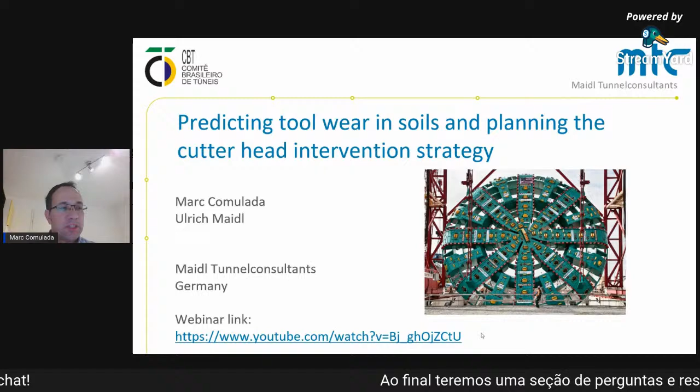Thank you very much, Daniela, for the introduction. I'm very pleased to participate in this webinar hosted by CBT, the third webinar we're holding now on different topics of TBM tunneling. Today we have a topic which is maybe one of my favorites right now, quite a difficult topic and also quite an important one. It's on predicting the tool wear in soils and planning the cutter head intervention strategy. This is a short overview of the contents we'll go through today.

I'll start with an introduction, then we'll discuss tool wear. Inside tool wear, we'll go through the governing factors, how abrasion is measured in soils, how we correlate abrasion and wear, and how we manage tool wear. Then we'll continue with interventions: when to intervene, types of interventions, procedures for interventions, and finally a strategy approach to handle this topic, plus some concluding remarks.

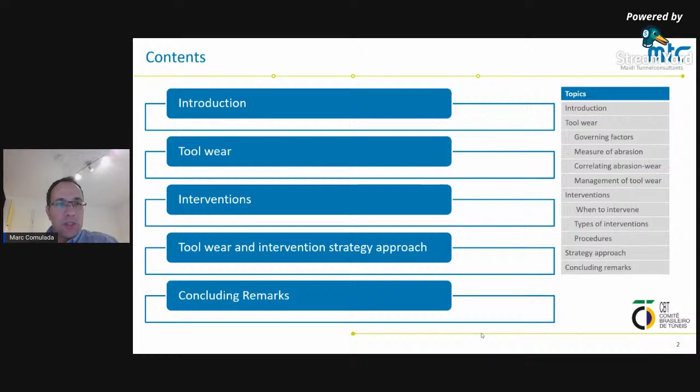So just a very brief introduction. This is going to be a presentation with quite a practical point of view, among other reasons, because for tool wear prediction and intervention planning in soils, it's a very important topic for designers and contractors, but there's hardly any solid theoretical model or background. As we'll see today, and I think that's the main aim of my presentation, to show that it's very complex, all the variables it involves, and different than in rock.

In rock, we would be able to present different existing models which are more or less validated and more or less complex, but actually there's no real soil or tool wear prediction model in soils. So it's based very much, as I point out, on the experience of designers and contractors. Although it is a very important aspect, because it is a main cost and time driver in shield tunneling projects in soils, and it is very often a source of losses and disputes.

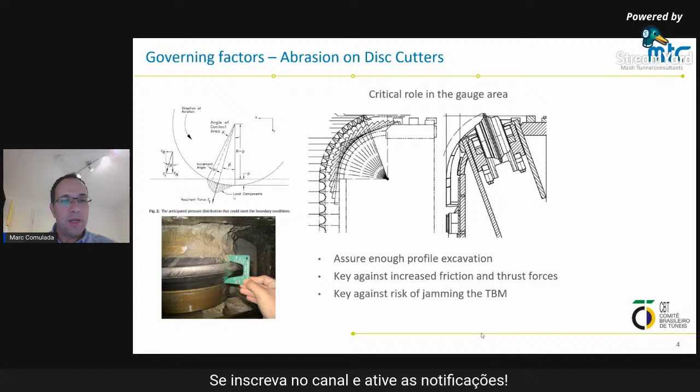Starting with the governing factors, we will start with abrasion, which is what I think most people come up with when they think of wear, but it's not only about abrasion, as we'll keep on seeing right now. The important aspect of abrasion is we have to consider the different types of tools on the cutter head. So we have the disc cutters to start with. I think more or less everybody's familiar with this type of tool. Disc cutters are not so much a tool to excavate soils.

However, disc cutters are installed in many projects excavated in soils. So that's why we're also presenting the disc cutters here, although they're actually hard rock tools. They play an important role in soils, especially to assure a proper periphery of the excavation, to assure that we have enough profile of excavation, and that the TBM is always going to have a gap to push through into the ground and not to get jammed. So in this sense, it's one of the main aspects for the disc cutters in the periphery area to assure the excavation profile.

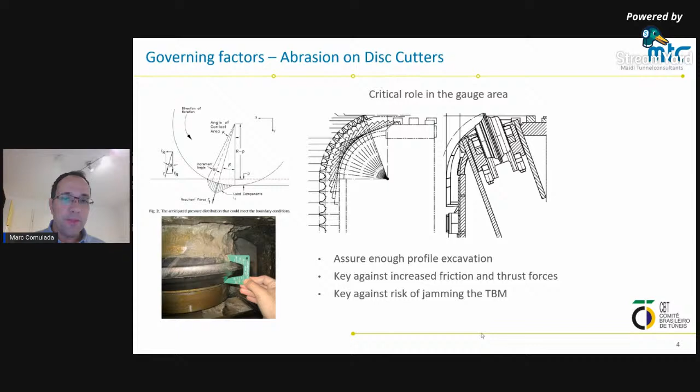And of course, these discs obviously suffer from wear. We can see a picture on the bottom left. One of the reasons they suffer wear so much, and become a crucial tool to decide when we have to enter the excavation chamber to do an intervention, is because they are located in the outermost part of the cutter head, often where we have the highest speed, so higher wear rates, as we will see later on. We also have to enter more often to change them than other tools, because we don't want to risk the TBM getting jammed.

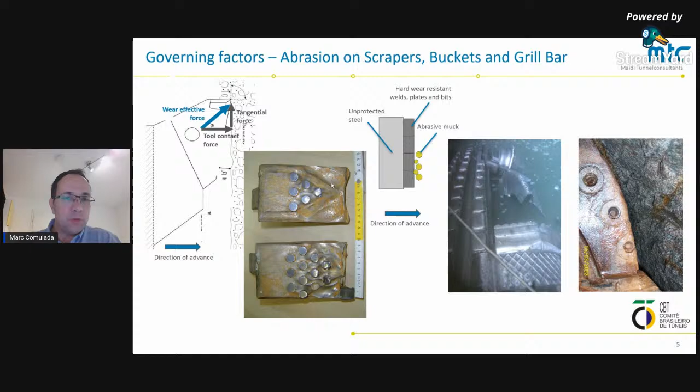And then we have another type of tools, which is also used in soft soils instead of the disc cutters, although from our experience, the disc cutters are still used in soils more than these tools that are the rippers. I think rippers are a very useful tool to excavate in soil, and they obviously also suffer from wear, and this is something we also have to analyze.

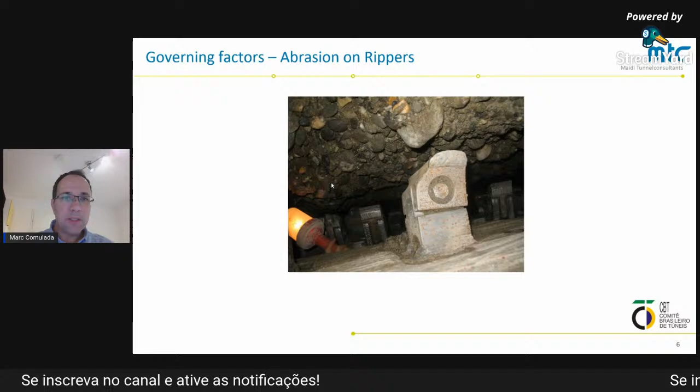I didn't mention it before, but the wear produced directly by the scraping or cutting process by friction is what we generally call the primary wear, and this would be increasing the secondary wear. Besides this, clogging also produces a blockage of discs, which produces higher wear of the disc because the disc starts to flatten. You can see that in certain pictures later. It flattens, it gets blocked, and then it starts to wear very easily because it's not turning, it's not working properly. And then we also have the blockage of the cutter head openings, which sometimes just block the cutter head. You can see some pictures here of blocked openings on the cutter head.

And then here is also another criteria for entering into the excavation chamber. We don't only have to enter sometimes to change tools for wear, but to clean the excavation chamber and the openings when we have a lot of clogging. So this is also an aspect to take into account when we're planning interventions.

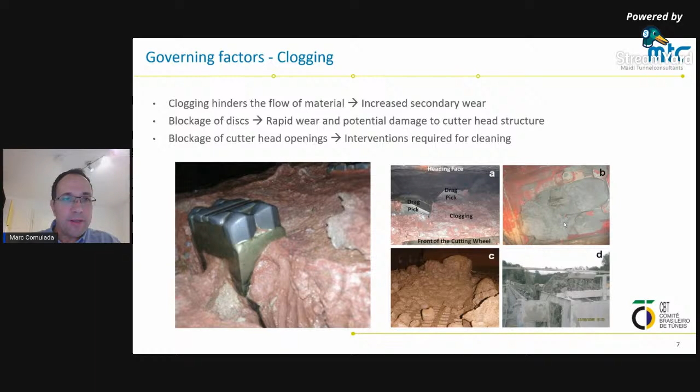There are other factors that produce wear and tear or damage on the tools, requiring intervention, such as impact loads that produce breakages or chipping of tools. In these situations, it's necessary to enter the chamber, especially when we have severe damage and the tools aren't working properly anymore. It's imperative to do an urgent intervention before further damaging the cutter head.

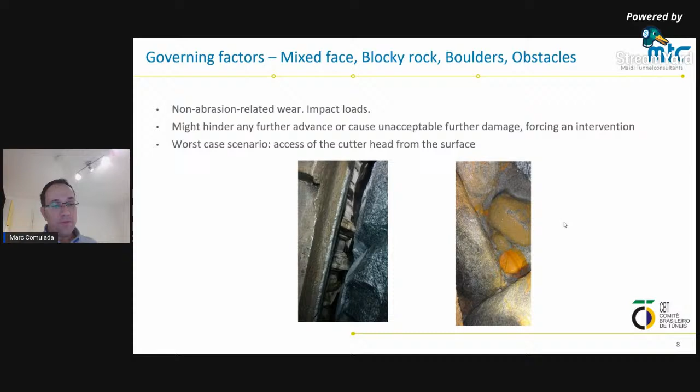This can happen in very few rings in shield tunneling, especially in EPB tunneling. We can have a large amount of damage if we don't intervene in time. In the worst case scenario, we have unstable conditions where it's not possible to enter the chamber anymore, and we have to access the cutter head from a shaft from the surface to repair it.

So there are several other aspects related to the cutter head design. Excavating exactly the same tunnel in the same geology, we will have a different situation regarding tool wear, tool consumption, and interventions depending on the cutter head design. This we've seen in many projects.

One of the first aspects in cutter head design is the selection of the tools. We have soft soil tools, as I mentioned before - the scrapers, and there's not only one type. There are different widths and shapes of scrapers, and selecting the right type for clay geology versus sandy or gravelly geology is crucial. Then, obviously, the disc cutters.

The disc cutters are actually rock tools, but we use them in soils too. We sometimes need them because we have soils with rock, mixed-face conditions, or boulders inside the soil. The only way of handling these rocky parts of the tunnel face is with disc cutters, and we can handle this with different sizes of disc cutters.

17-inch, 19-inch would be usual diameters in metro tunnels or bigger road tunnels. Deciding what type of cutter depends not only on the strength of the rock or blocks I'm going to encounter, but also on capacity. The bigger the disc cutters, the fewer disc cutters I can install - it depends on the size of the cutter head.

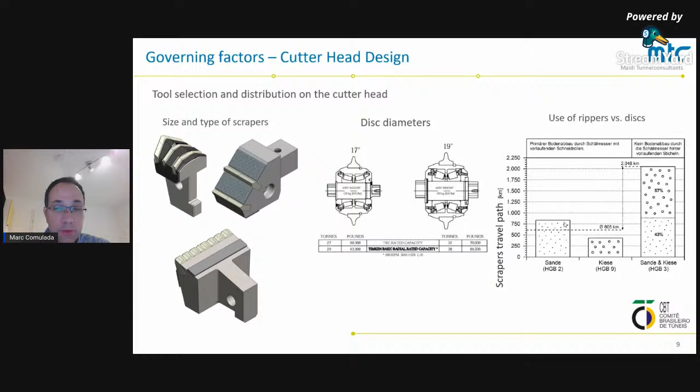Obviously more openings means the material will flow easier towards the back of the cutter head through the openings into the excavation chamber, and that's what we always want. We don't want the material to be moving in front of the cutter head very long, producing secondary wear.

And it also depends on the technology. EPB technologies generally require a more robust cutter head than slurry shields. Not necessarily always, as I will explain now.

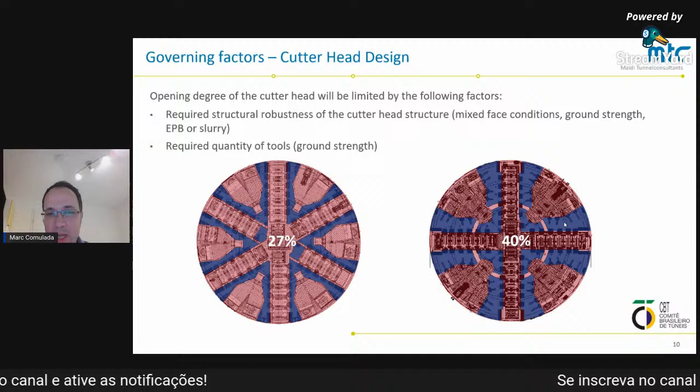So it had to be designed as a very massive structure, with a lot of disc cutters to handle very resistant rock. On the other hand, we have the EPB shield on the right-hand side, which is excavated purely in the same geology, a clayey geology, very, very homogeneous. So here we don't have any especially high loads, and we don't have especially strong ground, so it's possible to make the cutter head structure lighter.

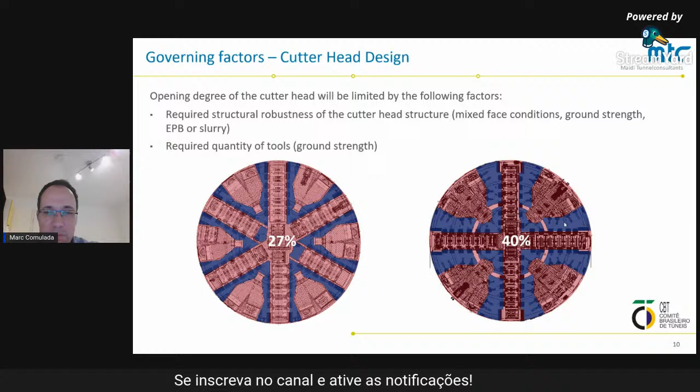And obviously, the situation on the right-hand side will be more favorable for minimizing wear, etc. But it's not always possible to do it that way.

And also the cutter head center - I will present several slides in this presentation regarding the cutter head center. It's one also, together with the gauge area, the periphery of the cutter head, where we have a lot of wear. The center is also part of the cutter head where we suffer a lot of wear, because precisely the cutter head rotation speed, the linear velocity in the center is very low compared to outside. So the material in the center practically can't move anywhere. Besides, sometimes we have to install tools to excavate the material right in the center, which makes us have the cutter head very closed with very low opening ratios.

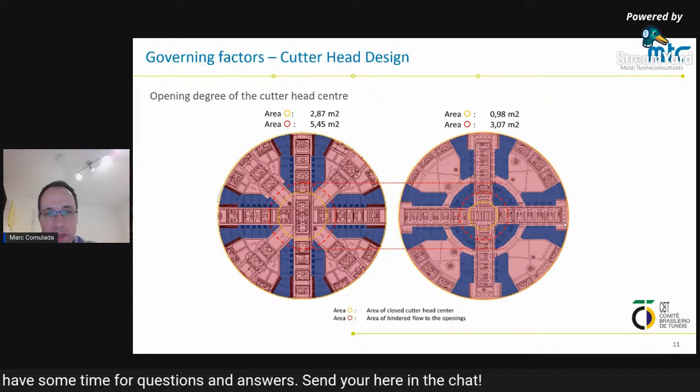However, there are more optimum designs than others. You can see this comparison here. These are two reference projects with very similar diameters. We can see on the left-hand side a cutter head design which is much more closed. We're comparing the area in the center, which is completely closed - it's much higher on the left-hand side, almost 3 square meters compared to 1 square meter on the right-hand side. And it's not only right in the center, also around the center, that's the red circle there - we have all these angles between the spokes of the cutter head, which are normally going to get blocked too. These areas in the cutter head on the left-hand side are also much larger than on the right-hand side.

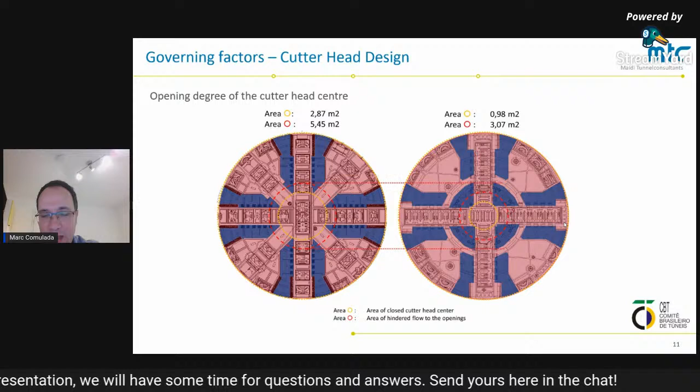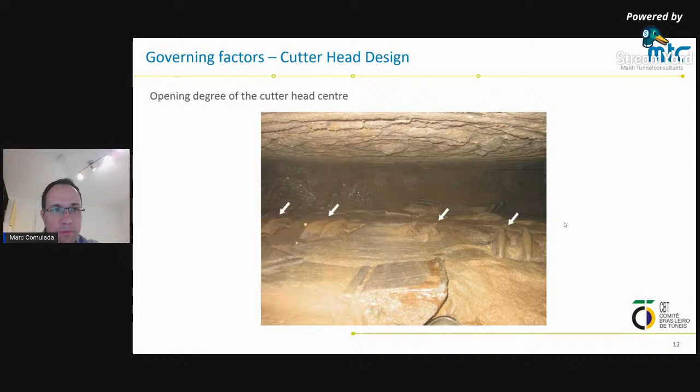Then there's other design aspects. I'm pointing these out because these are parameters that we can more or less actively design, and they have a very relevant influence on the cutter head.

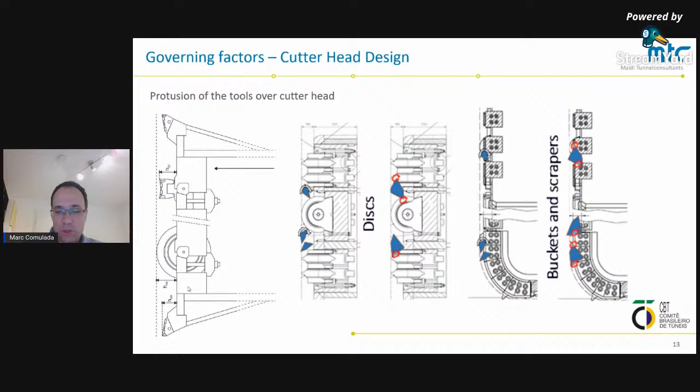This is the level of protrusion of the disc cutters over the cutter head, and of the scrapers or rippers. Depending on the geology, if we know we're going to hit cobbles and boulders in the soil, we need to plan a height of protrusion high enough to allow easy flow and movement of material in front of the cutter head. If we had a very small protrusion, the cutter head structure, tools, and scrapers would be more prone to impact loads and wear.

There are other aspects too. When the cutter head is large enough, we can install hub protection wedges that protect the housing of the disc cutter. With these welded wedges, the disc cutter hubs, which are the body of the disc cutter, are more protected against impact loads or secondary wear. Obviously, this is only possible when we have enough space on the cutter head to install all these wedges.

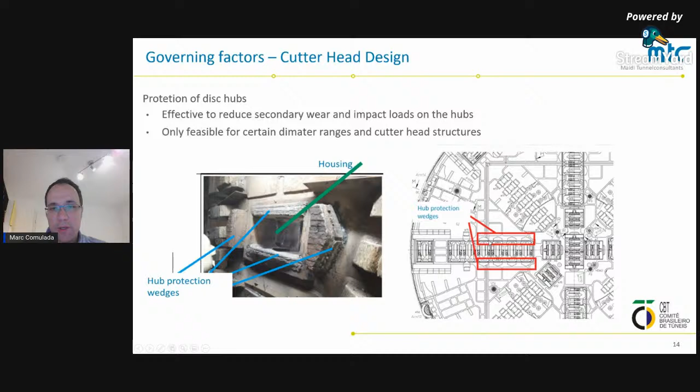Then there are scrapers. These are tools that, especially with more gravels, cobbles, and boulders, suffer a lot. The design of the scraper is very important here.

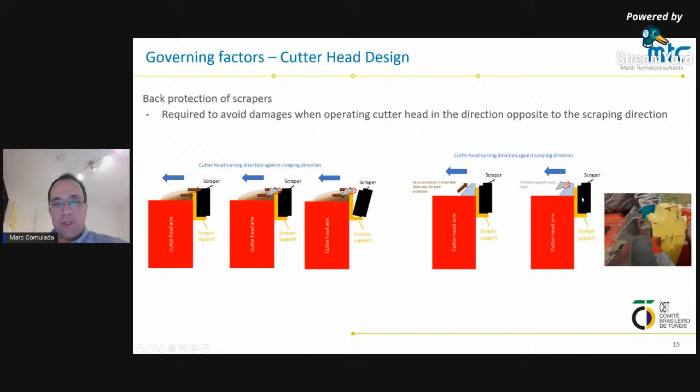There's a basic thing sometimes missed in designs: the back protection of the scrapers. You can see in the photo the scraper protruding out from the cutter head, and this is the back protection. If we don't have back protection, when the cutter head rotates opposite to the scraping direction, material accumulates on the back of the scraper, and particles like gravels, cobbles, or pebbles can damage the scrapers. The back protection protects the scrapers when they're not working in the scraping direction.

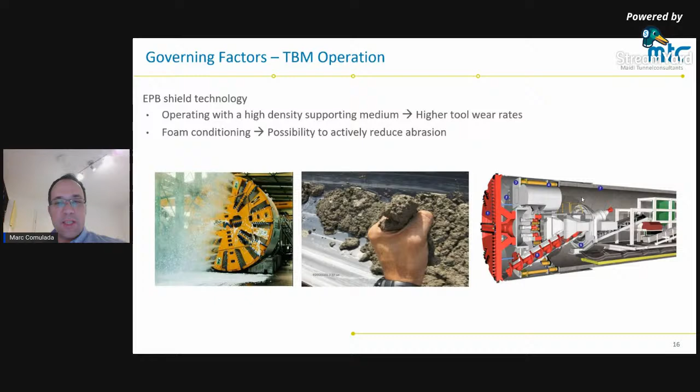Then there's another set of governing factors: the actual TBM operation. Here we should make an important difference between EPB shield technology and slurry shield technology. EPB shield technology operates with high density muck in the excavation chamber, which tends to have higher tool wear rates because we're excavating dense muck. On the other hand, EPB shield technology allows foam conditioning, and this foam conditioning is a key aspect to minimize tool wear.

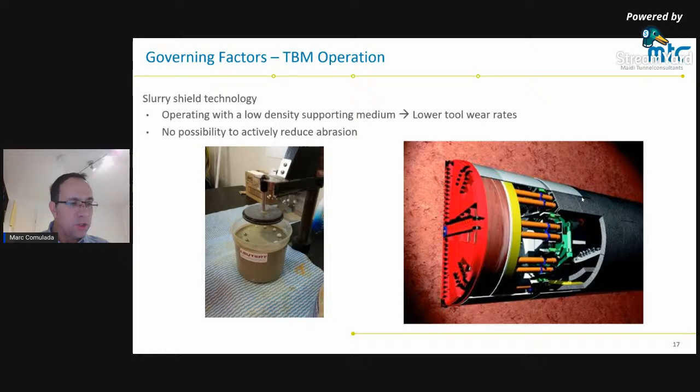In slurry shield technology, we operate with a slurry suspension of liquid consistency in the excavation chamber, and from that point of view we tend to have lower tool wear rates than in EPB shield technology. On the other hand, contrary to EPB shield technology, we have no possibility to actively reduce abrasion.

Now, regarding TBM operation, there's the impact of the travel path - the kilometers of path the tools travel while rotating on the cutter head. This is a study from the doctoral thesis of Köppl. The mass loss has a linear correlation with the travel path of the disc cutters on the cutter head, and the travel path, for the same length of tunnel, is something we can control with the cutter head revolutions and the penetration.

We can actually operate the TBM in a way that produces a lower travel path and lower wear on the tools.

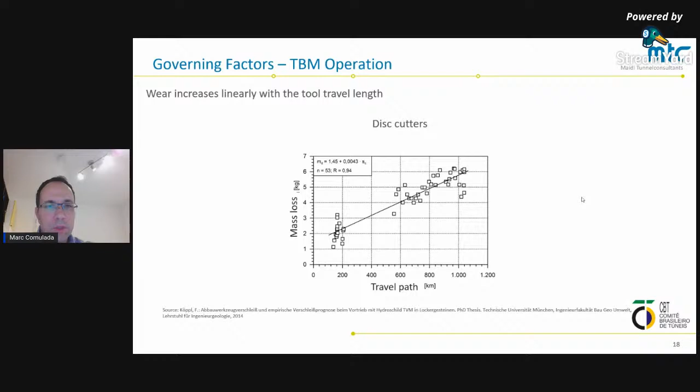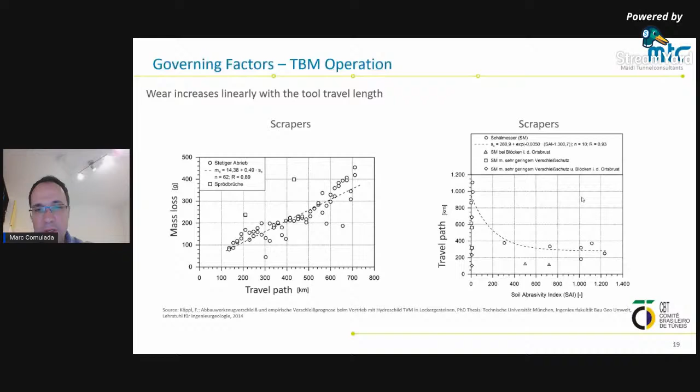The same behavior is seen with scrapers: an increase of mass loss linearly with the travel path of the tools. This is shown on the left-hand side, and on the right we can see the travel path attained by scrapers in several projects against a soil abrasivity index. We'll go briefly through the different abrasion test methods later, but the higher the soil abrasivity index value, the higher the abrasivity of the soil. Here you can see how with higher abrasivity, the travel path reduces exponentially, then tends to stabilize in the high abrasivity area - there is a big influence of soil abrasivity on the attainable travel path by the scrapers.

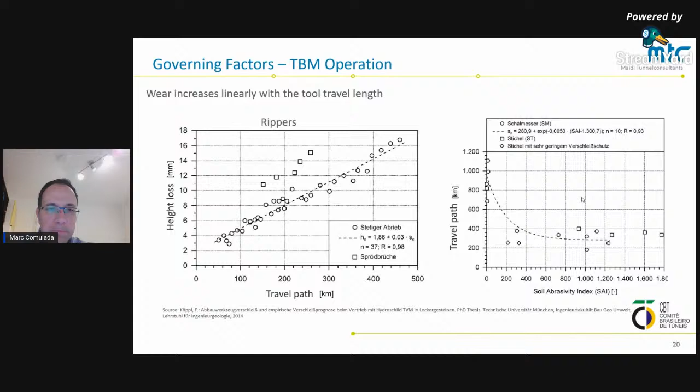And then the TBM operation. We can operate the TBMs and design the cutter heads in one way or the other, which will make the excavation more prone to wear or not. And one parameter that's always correlating very well with wear is the specific energy.

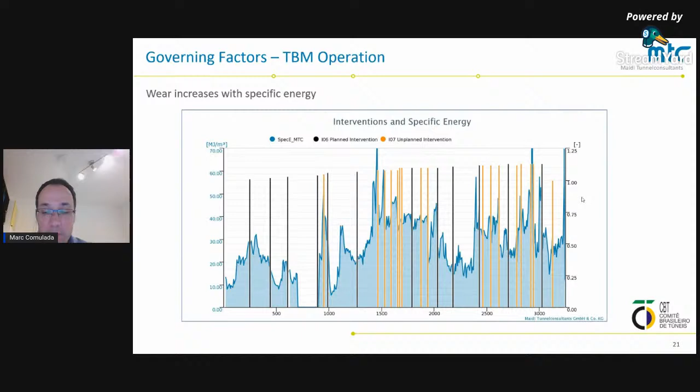And all these unplanned interventions had to be done. So the TBM operation itself, which we can also improve or control in many ways, also has a very big impact on the resulting tool wear, tool consumption, and number of interventions.

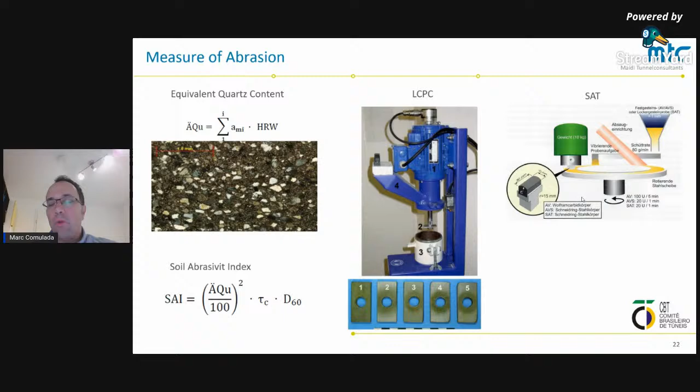And there's no direct correlations to date yet between these parameters and tool wear, although there are some empirical relationships in the literature.

So from here, we have the abrasion. We can measure it in the soil, and then we need to plan how many tools we will need in a project. And for this we need to know the wear rate.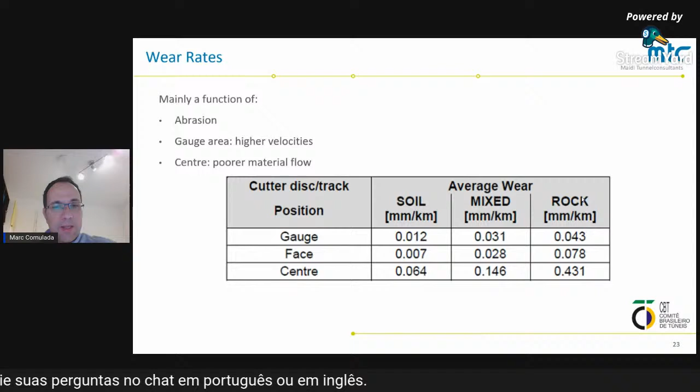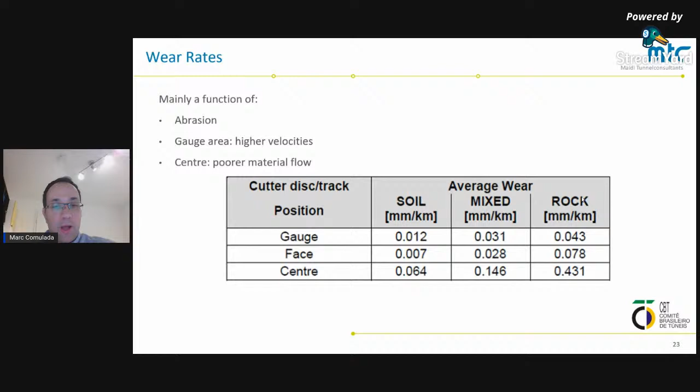On the tunnel face, on the front, not too close to the center, we generally have the lowest wear rates. In the center, we have very high wear rates, related to the aspect I explained before. All this has to be taken into account when estimating tool consumption, and also when estimating how often we'll have to enter the excavation chamber.

So that's what we call the tool lifetime. Tool lifetime we measure generally in cubic meters per tool - how many cubic meters can a tool excavate? This is not only related to the wear or abrasion, as we saw in the table before, which is millimeters of wear per kilometer. This lifetime depends, for instance, on when I want to change that tool - do I want to change it when it's worn out 10 millimeters, or 20 millimeters?

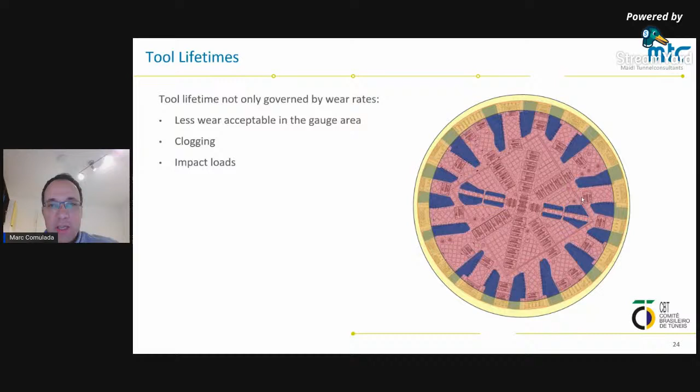For example, in the gauge area, marked in yellow here on the cutter head, we want to change the tools earlier because we don't want to risk the shield getting jammed. So we have a lower acceptable wear on the outer discs, which normally conditions the need for intervention - the wear on the outer area. Then there are other aspects like clogging or impact loads, not directly related to abrasion, that will also govern the actual tool lifetimes.

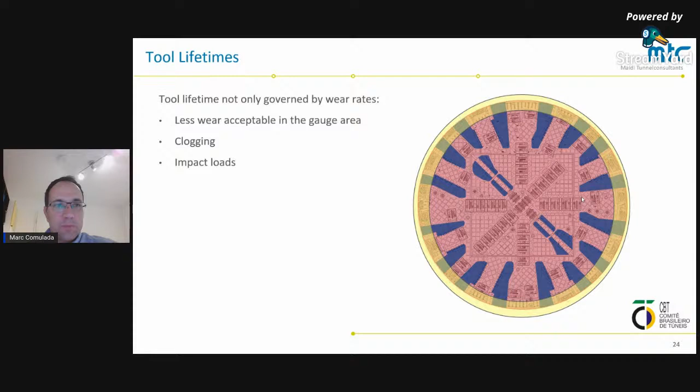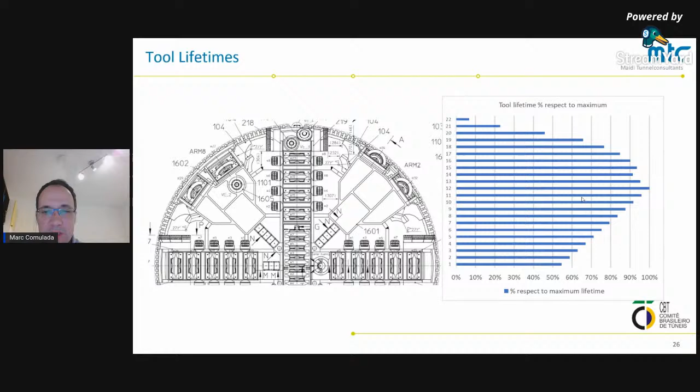This very low cutter tool lifetime in the periphery, we can see it here in percentage. We're showing the percentage relative to the maximum tool lifetime on the cutter head. The maximum is in the middle of the radius, and the minimum in the gauge area is even lower than 10% of the actual capacity of that tool if installed in another position.

This value at the top is telling us when we have to plan the interventions. When I reach that lifetime that I don't want to exceed on the outer cutters, that's when I actually have to enter and change those cutters. So that is going to govern my intervention strategy.

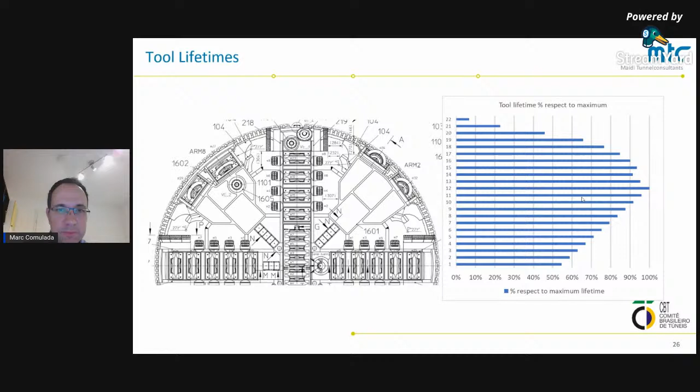And here's one of the questions - now we're jumping into interventions. When do we have to intervene? Well, we have all our predictions based on wear rates and on experience, but there's also the TBM operational parameters that I mentioned before, like the specific energy.

There are other parameters like temperature. The temperature in the excavation chamber starts to increase when the cutters are not able to cut efficiently enough because they have too much wear. A lot of energy is then dissipated, not in cutting or loosening the material, but in higher friction and generating more temperature. So all these are indicators.

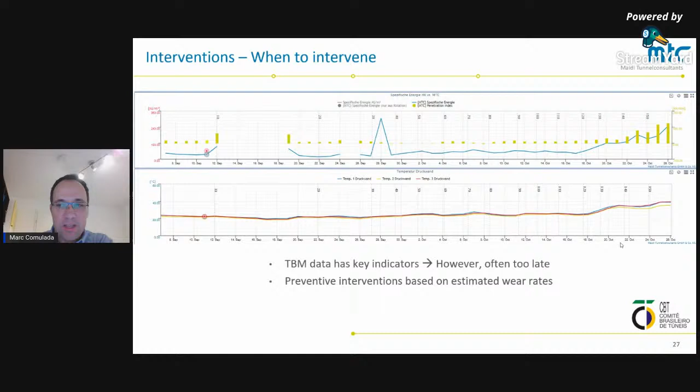However, experience shows that before we can actually see such a clear reflection of the impact of wear on the TBM data, it's generally better to do preventive interventions based on the estimations we have performed for tool wear rates and tool lifetime. Later during construction, we can optimize the spacing of interventions as we get more familiar with the particular wear rates at the project.

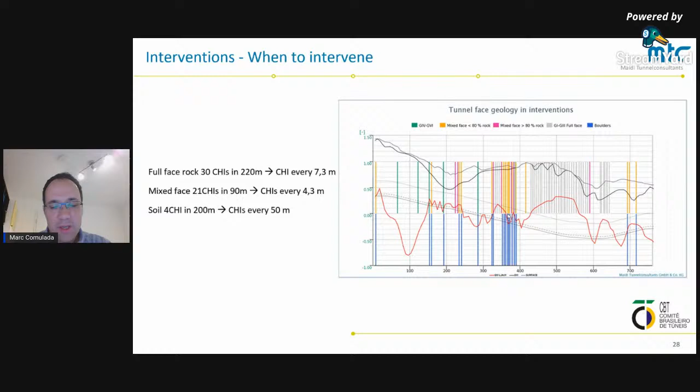You can see the average intervention spacing in full face abrasive granite was 7.3 meters, meaning entering the excavation chamber every 7.3 meters for a tool inspection and tool change. In mixed face, this number was even worse, every 4.3 meters. And in the soil stretches, every 50 meters. So you can imagine the big impact if you don't predict this properly in your planning of the tunnel, or in planning of your bid. It has a huge impact in terms of costs and time.

So for interventions, we know we have to enter the chamber and do them. Very basically, there are free air interventions or hyperbaric interventions. Free air interventions, which we're talking about for soils in this presentation, are basically only possible in stable face conditions, maybe more in clays, and also in dry conditions or with very low permeability and low water flows. Otherwise, if we have unstable face conditions, we have to carry out hyperbaric interventions.

Hyperbaric interventions are more complex, and as I will briefly present today, they're also more costly in time and money, because we have to compress the excavation chamber with air to work safely. Depending on the pressure we have to apply, that will depend basically on the water column pressure that we have to balance.

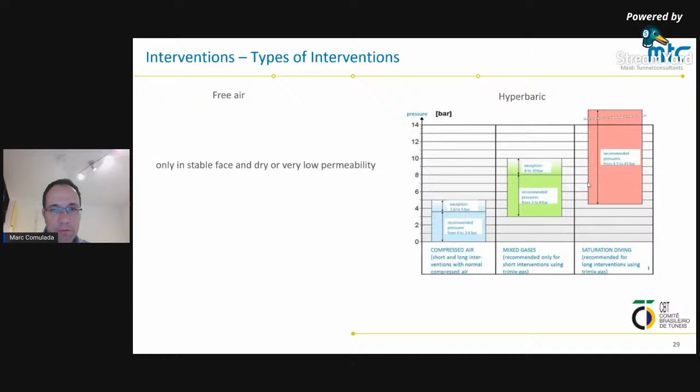We have different types of hyperbaric interventions: regular compressed air from 0 to 4 bar, depending on the regulations. If we're higher than 4 bar, we have to start working with mixed gases. And if higher than 5 to 6 bar, saturation diving. All these situations are technically quite complex to organize, and from a safety point of view, the procedures are complex to carry out.

In slurry shields, it's quite easy to generate a filter cake because we use the slurry suspension anyway as a supporting medium during excavation, and we have the means of feeding, the pipelines and everything to feed slurry into the chamber and extract slurry from the chamber easily, with good face pressure control.

That's not so easy in EPB shields. EPB shields only have the screw conveyor, and when we start to exchange the solid muck for the liquid suspension, generally we have very high pressure fluctuations. It's more difficult to carry out interventions safely in EPB technology generally, if no additional measures are taken.

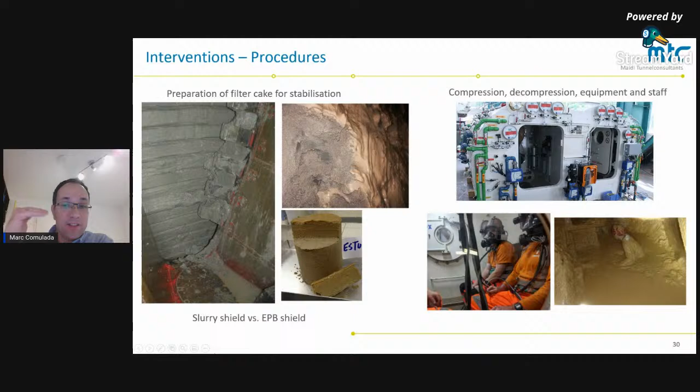Within the procedures for hyperbaric interventions, we have all the aspects related to the compression of the personnel that has to do the works, and the deeper decompression times in the manned locks, which delay these processes a lot and make them more costly. There's a lot of equipment involved, and also specialized staff and even medical staff that has to be on site when this takes place. So all these aspects imply time and cost that have a big impact on the project.

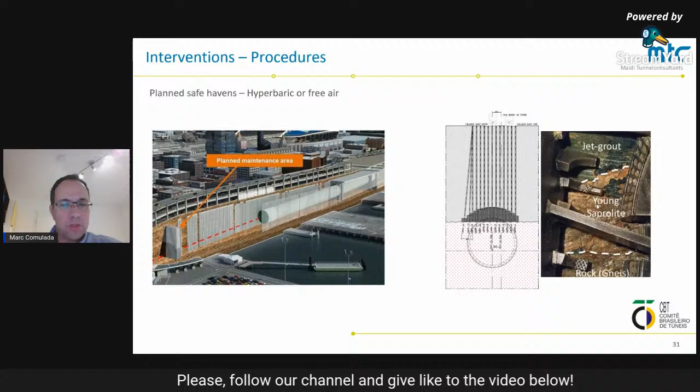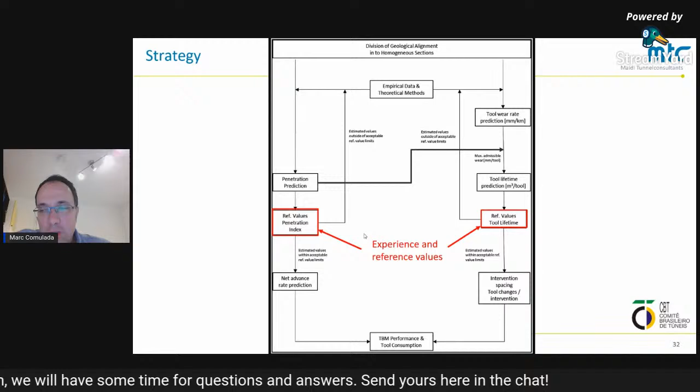Then we also enter the variable of what penetrations are possible in this soil. If I can work with a higher penetration, it will be possible to reduce the travel path of the tool, increasing the tool lifetime in the end. Entering these variables, we can determine the tool lifetime, and then we have to check if this estimated tool lifetime matches the tool lifetime we have in other projects with similar geological conditions, similar TBMs, similar cutter heads, etc.

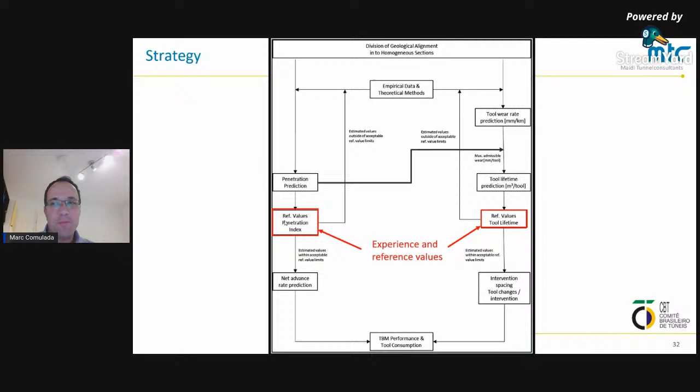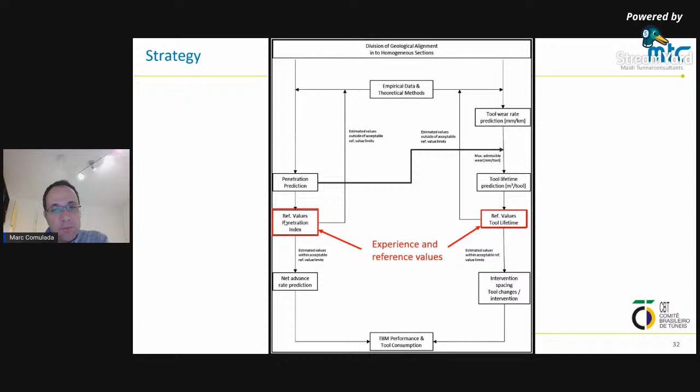Once you have the tool lifetime, we can start planning the interventions. We can plan, okay, we'll have to enter the chamber to change the gauge cutters every 25 meters, for instance. We'll need so much pressure, so much time for interventions, and we can start calculating the time. This is the procedure we generally follow to determine the interventions and tool consumption. But I've marked these aspects in red rectangles because certainly the only way of corroborating our predictions is based on reference values, on literature, on the few correlations we find there, but basically from experience to confirm the predictions.

So just a few very brief concluding remarks. Tool wear is strongly dependent on factors other than abrasion - it's not all about abrasion. TBM type, cutter head design, TBM operation - the tool wear prediction models mostly neglect or underestimate these factors. There's actually hardly any models, and it's very difficult to integrate all these variables, which have a big influence, a big impact on tool wear and tool consumption.

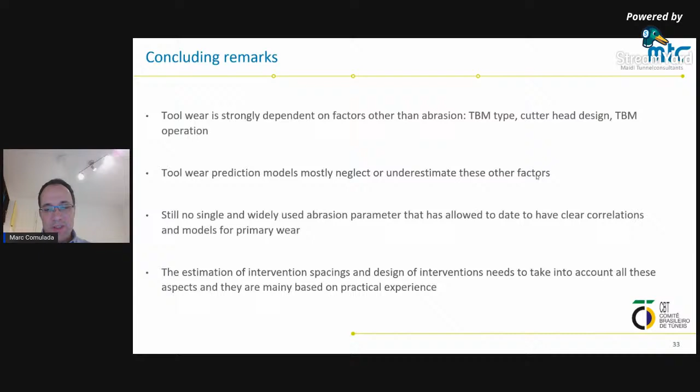And there is still not enough empirical data because there is no single or widely used abrasion parameter that has allowed, to date, clear correlations and models for the primary wear either. So we don't have that much base information. Finally, the estimation of the intervention spacings - that's the distance, how often I must do interventions - and the design of the interventions also needs to take into account all these aspects, which are basically mainly based on practical experience. So with this, I finalize the presentation.